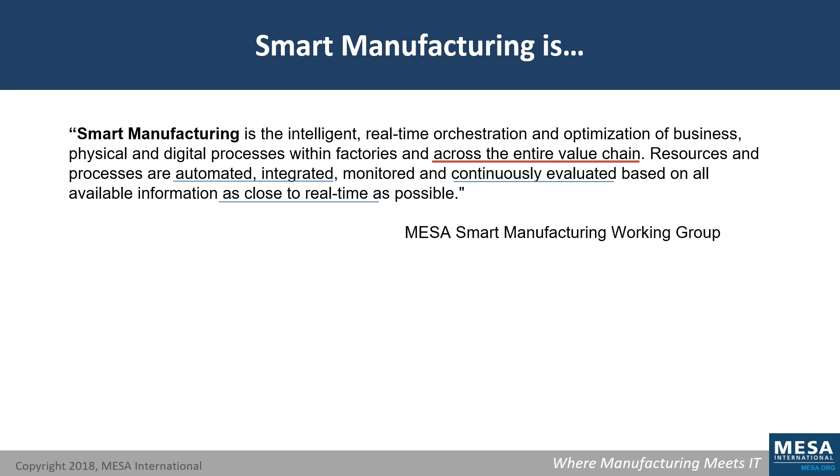But what is different about smart manufacturing compared to the last few decades of automation? Because after all, automation, integration, real-time sounds like things we've been doing for a while. What is different is that we're talking about a much, much higher level of connectivity. And we're talking about doing that across the entire value chain. We're going beyond the old hierarchical models, like the ISA-95 model.

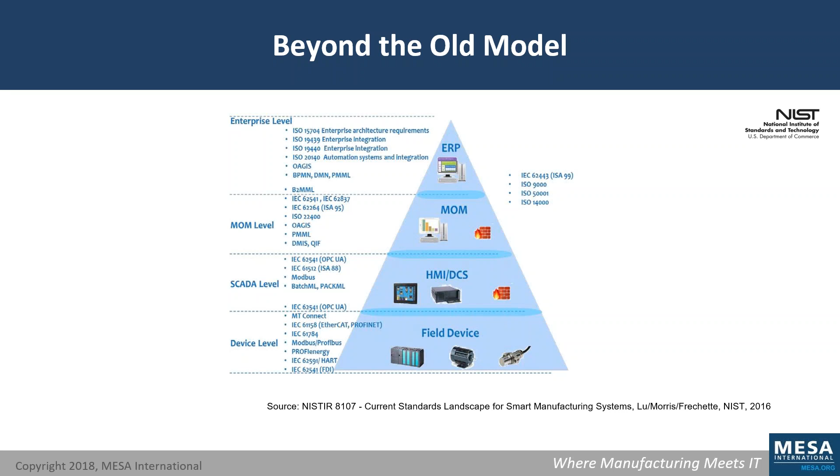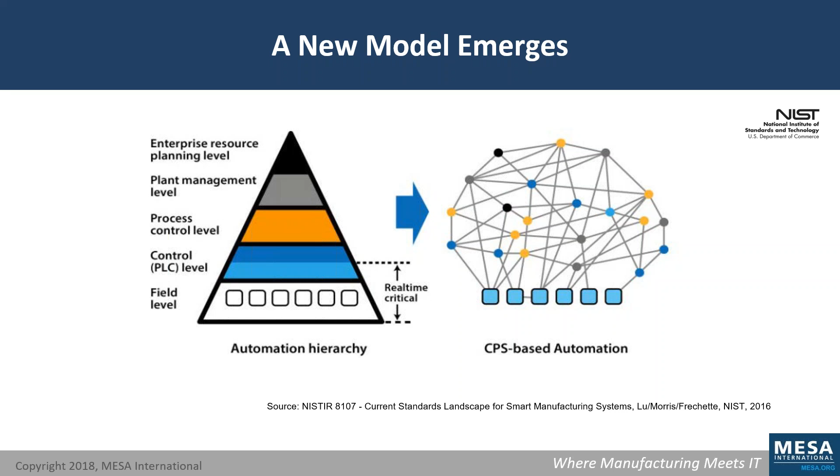We're leveraging technologies like wireless, mobile, artificial intelligence, cloud, and edge computing to achieve much higher levels of automation and connectivity. For example, NIST did a study of data movement in smart manufacturing and concluded that the old model was too constraining for this new, highly connected world. NIST believes that we're moving to a network of intense digital communication in all types of directions in the future of manufacturing, forming a complex digital tapestry. And believe me, that's a good thing, not a bad thing. It seems like a difficult thing, but we're going to make it easier.

By organizing this network of communications into three dimensions: digital thread, smart factory, and value chain. Dimensions that help us organize, explore, and explain these initiatives and understand the pull from each of these stakeholders' perspective on the transformation. We will discuss each of these dimensions right after we do a quick poll.

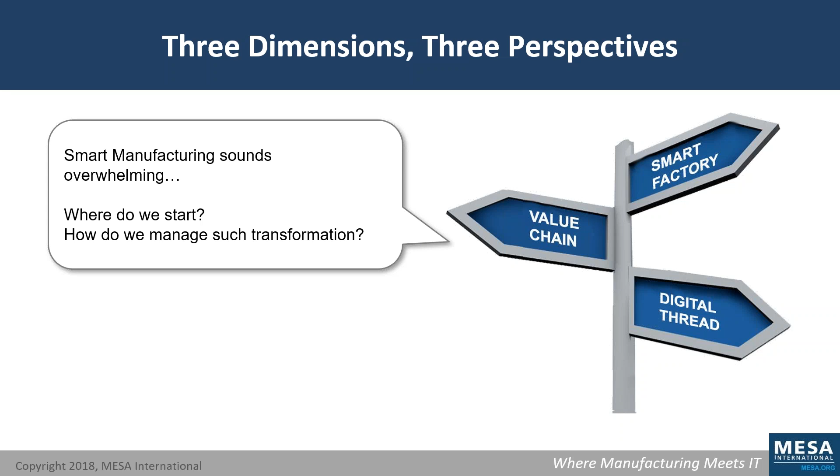And this is going to be a multiple choice poll, and your first time to participate. So please let us know which type of initiatives are part of your smart manufacturing journey in your company. What are the kinds of things you are working on today? Okay, I will give you a minute to do that.

And while you're doing that, I'll let you know a little tidbit here. I recently read an article that Accenture surveyed manufacturers and showed that 68% of executives believed that they had to work on digital transformation, but only 16% had a roadmap, a definite plan, and only 2% were executing to their plans. So at MESA, we're developing tools like these to help you develop those plans, to create your roadmap, to move forward. So let me see, I'm going to close the poll.

Thanks for sharing, and let's see what we have. So what we have is that IoT, smart factory, is really the dimension that is getting most work done, but we still have a considerable amount of people working on digital thread and on the supply chain dimension. You know, it's very often, like Gartner's reported, that the supply chain is being worked independently of these dimensions in the factory. But at some point, the manufacturers that really get these dimensions together are going to be the leaders of the future ecosystems.

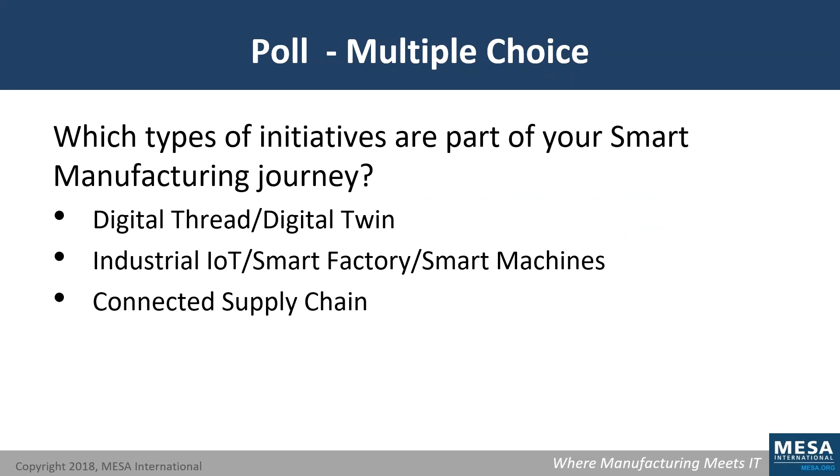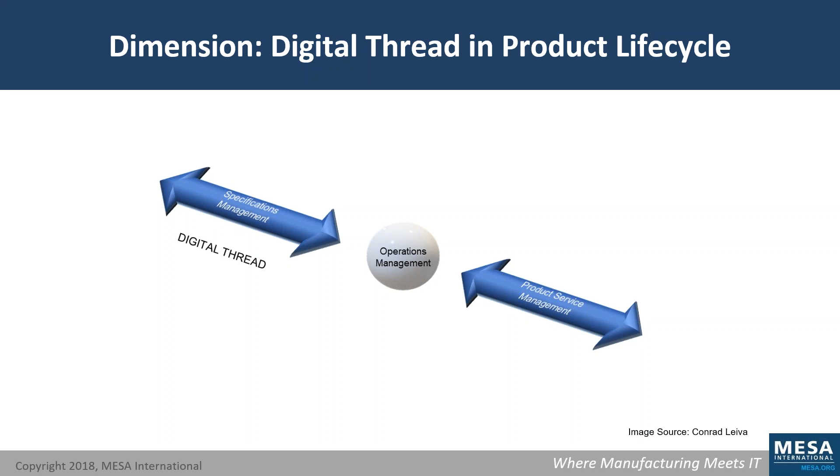So let me move on. Thanks for participating in that poll. We're moving together here. So now it's time to start drilling into each of these dimensions, and we'll start with Stu talking about the digital thread dimension. Go ahead, Stu, please.

Thanks, Conrad. You know, having started my career in product development companies, both large and small, I think the digital thread is enabling so many more opportunities to streamline processes and eliminate all the repetitive, manual, paper-based processes. It's just time-consuming, error-prone, and frankly, just not value-add.

Now, I like this graphic, although it's kind of rudimentary, but it effectively represents the process to define and produce a product. But you can imagine the other half of the equation, or a diagram much like this, that happens when you sell products, especially those that have to be supported through maintenance or warranty.

But I think one of the most important elements of digital thread is that concept of the repeatability, right? Digital transformation, especially with the addition of IoT, enables all our smart products to report back on their usage, giving product makers a lot more feedback on how to improve their products.

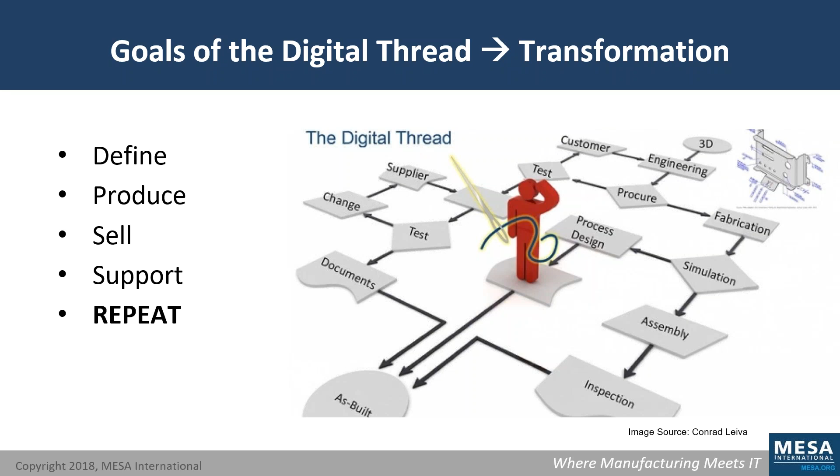Next slide. Now, I think it's important to set the scope of my remarks today on how the digital thread enables smart manufacturing. We can do a whole session just on digital thread. But the point I want to make today is that we're on a journey, right? A transformation between the old way and the new ways that all these digital technologies are providing us. And as quickly as we streamline and automate, products and processes are getting even more complex.

So at a minimum, the front end of the process is about populating that digital thread with voice of the customer requirements, what the product's supposed to do, that are then translated into design specifications, cascaded into functional requirements. And of course, in order to produce a product that's fit for purpose, we need to translate those specs into quality requirements, checks to validate that we're producing against the spec. And of course, we always have the ever-present compliance requirements from industry, government, customers.

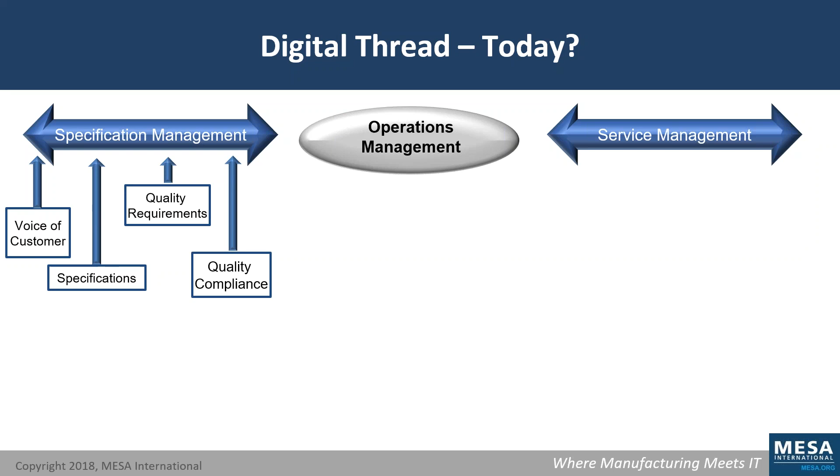But this job has become much easier to digitize with modern CAD and PDM, the model-based design. That's what MBD stands for in that acronym. That allows us to capture and document the requirements as data entities in the model, and then manage how the design satisfies those requirements. In fact, CAD and CAM systems have become very robust in terms of defining that overall product and digitizing the processes to produce them.

But we still see every day manufacturers who are still translating all their digital definition files, like CAD models, into paper documents like drawings and work instructions for execution. And I think there's a lot of opportunity for improvement in extending the digital thread through production operations. And Conrad will talk about that in the Smart Factory bit. But when we translate into a digitized operational system like MES, we tend to lose associativity between the model and all the subsequent operations against that model.

For example, I think we're getting much better at managing and documenting production quality. And we've had digital test systems and libraries for decades. But there's still a lot of translation and duplication of data as it goes from CAD to CAM to MES and into QMS. And I submit that might explain this continuous increase in product recalls, even though we still have quality compliance, kind of always just right along as a check in the box. But the after-sales service component, I think, has a lot of opportunity for enhancement as well. Next slide.

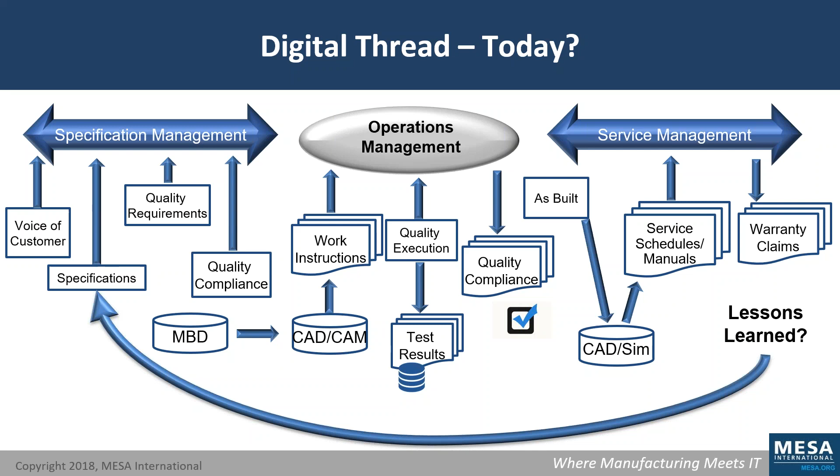Because what happens in this diagram if a change occurs, right? All of these handoffs, all of the processes need to be repeated, and somehow documentation needs to keep up to date. So one of the things that's missing, in my opinion, is a common platform upon which to store, communicate, and archive all the data to facilitate all these necessary processes for both product development and manufacturing, for the complete life cycle of the product.

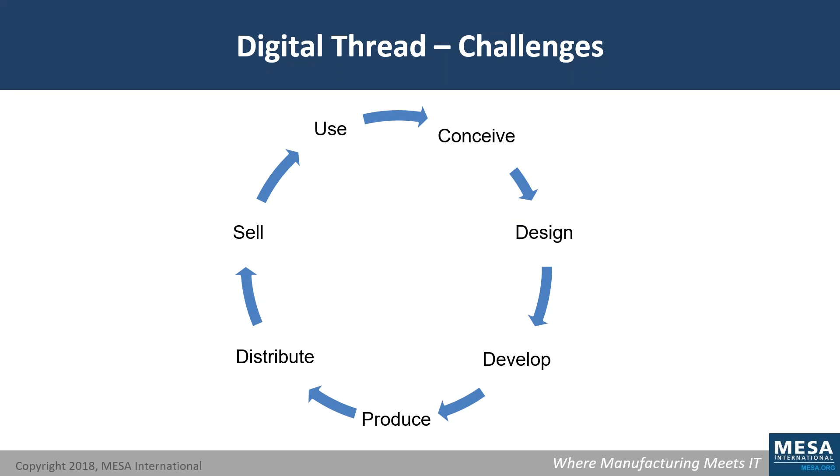Although I spent most of my career in PLM, I don't think we're there yet. Because between PLM, which is fundamentally an iterative platform that acts as a system of record up to release to manufacturing, and ERP, which is a transactional-based system of record from then on, it's challenging to keep all these data streams moving. And then within and frankly crossing over both these two is manufacturing execution, or MES.

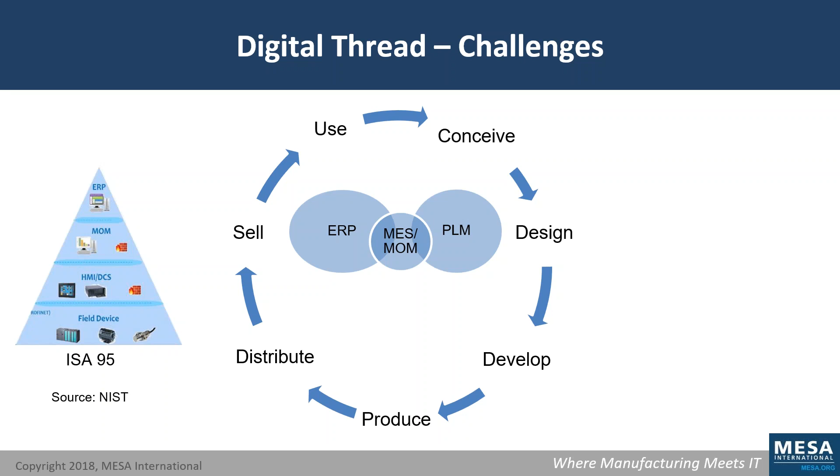Now, as Conrad mentioned, ISA 95 tried to reconcile all the data communication requirements, at least between the floor, MES, and ERP, but I agree with NIST that it's an old model and it's just not robust enough for today. And now we have new CRM systems like Salesforce.com getting into the fray, positioning as the repository for all the Internet of Things data, the smart products data. So now you've got new crossovers between IoT and CRM.

And again, all this is fine because each domain has different needs. But the point is the data I described in that previous slide has to somehow find its way from start to finish and hopefully repeat. And it's not like these silos can't be connected, because they can be, and they are being every day. I think many companies will call themselves model-based enterprises when they've effectively done this.

But the integrations are far from simple, and there are just too many different formats to convert from one domain to the next. And this was the point of an earlier white paper from MESA regarding smart manufacturing, the landscape explained. Because I think what's missing is that common schema for cradle to grave. And although the Venn diagram doesn't really capture the complexity of the challenge, this connected enterprise system with operational execution at the center is, I think, what we're really looking for and what the paper describes.

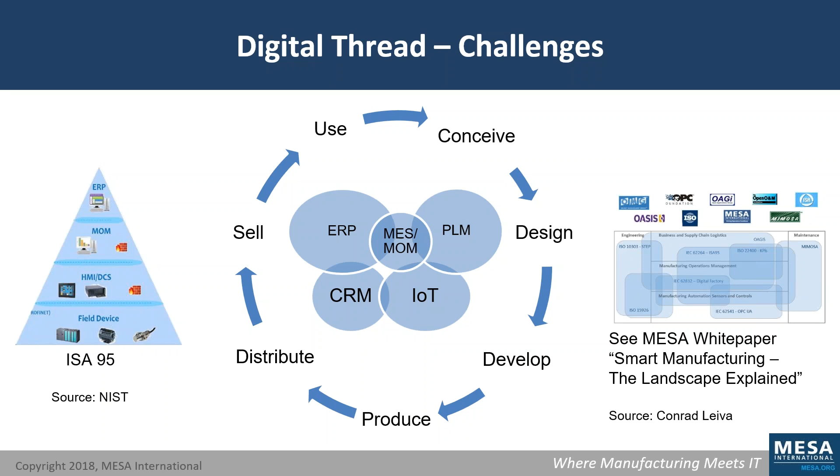So again, I think NIST is probably closer to reality than anyone else, but I always envisioned the digital thread as this flow from left to right, where the business has its need to sell a product to make revenue. R&D puts forth definition of the product to satisfy market requirements. Supply chain consumes those characteristics and often is contributing back as engineering partners.

Production execution has to extract functional requirements and then add back the actual performance against those requirements. Service is leveraging manufacturing and maintenance requirements and understanding the mechanical functionality so they can hopefully sort through why a solution failed. And again, adding on the new IoT to give us this closed loop of performance information that can help go back into the process and wash, rinse, repeat, right?

Because I think the biggest value of repeatability and having this data model is to eliminate manual paper-based movement of data with networked data, so that when a change occurs, it's easy enough for the database to adapt. So I think the future will be a network of data points connecting to and referencing each other as appropriate to the task at hand. It'll need to be in a common database or at least a network of interconnected databases. I think that's more realistic.

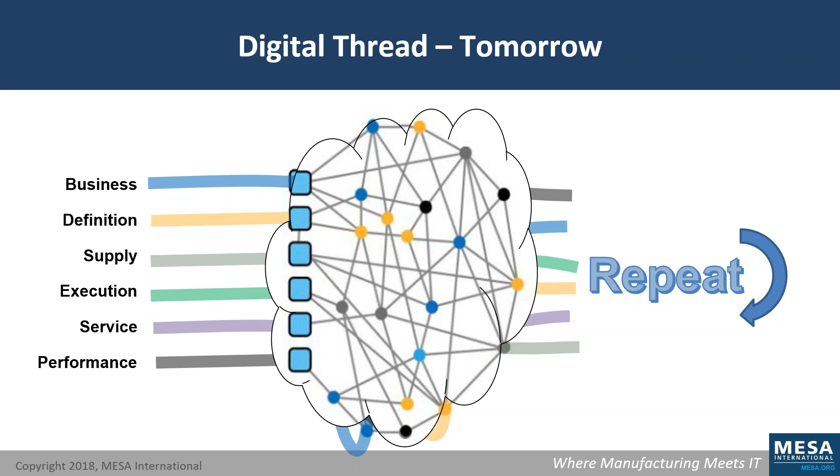But I want to close with an example from one of my customers, GenZe Scooters, a truly connected product, a smart scooter. They've got sensors and telematics designed in throughout them that constantly communicate with their data center. They send signals on the health of the vehicle, usage patterns, fault situations, and at any time GenZe knows where these scooters are, since they often sell to fleets, how much charge is left on them, and the speed they're traveling.

And all of these signals for each consumer are combined and stored with the VIN number in their Plex manufacturing cloud, along with all the service history and all the after-sales service management. It's a beautiful example of the Internet of Things going beyond the four walls and bringing data back in. But GenZe uses the learning from these signals to impact future designs.

In fact, they're considering scooter as a service to price by the miles rather than upfront. And then they can plan their lucrative service and maintenance business around that new revenue model. And of course, they've created their own closed loop digital thread by integrating their design systems with their execution systems

and the business systems. And one of their biggest challenges is they source materials and components from suppliers and partners all over the world, which sets up a pretty challenging value chain problem, which I think is the perfect segue to hand over to Jimmy to talk about the value chain management dimension of smart manufacturing. All right, so Jimmy, can you tell us more about the value chain dimension?

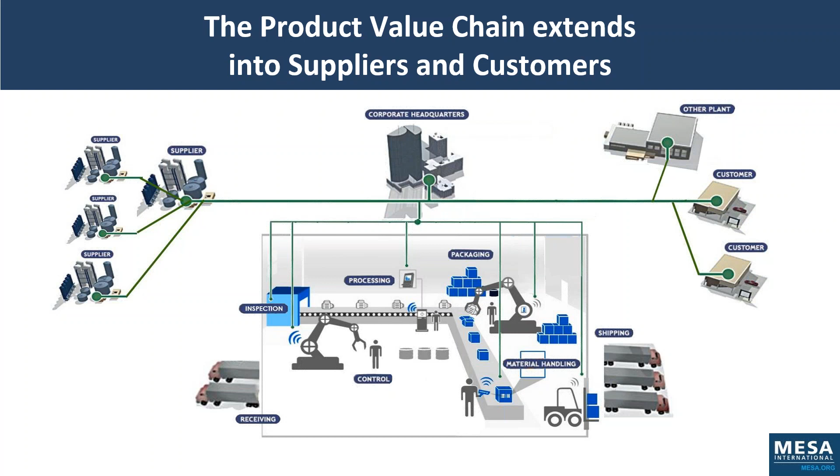transparency. This means that each node is exchanging data with the other. We must greatly improve these lines of digital communication, moving from emails and phone calls to a truly set of digital threaded workflows with our value chain partners. One example that I like to share is in the food industry. When you think about it, food is a product of chemistry, yet its makeup is completely dynamic and changing. The ingredients themselves are changing.

Their breed, age, environment, and diet can alter the milk itself. While we might think of some elements like taste, the fat and protein content vary as well. These are the elemental makeups of cookies and yogurt. Now, in the case of our yogurt manufacturer, how do they account for this? They need a consistent level of fat and protein to get a consistent product.

Oftentimes, blending is used to ensure that you have a baseline consistency, mixing different milk sources together, either through the co-op or at the factory itself. But sometimes that might not yield optimal results. In the case of the manufacturer, we'll use condensed milk to boost levels, requiring a surge in the supply chain or an alteration of the manufacturing process itself.

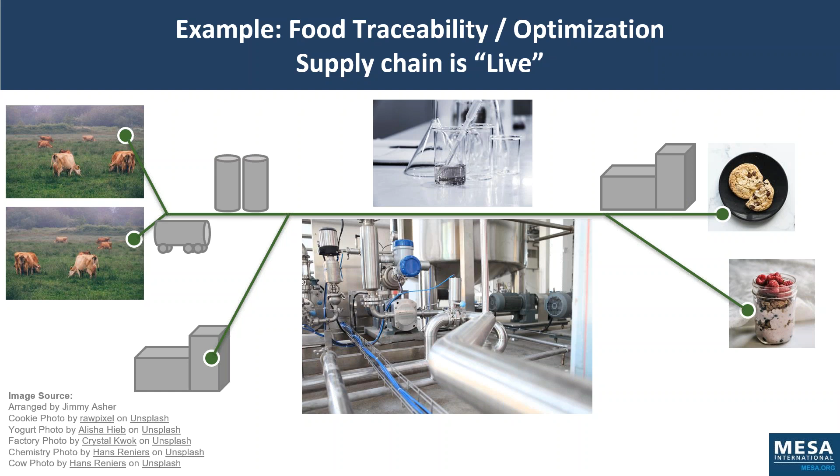Okay, thank you, Jimmy. As you mentioned, each plant, each factory is a node in a multi-level value chain. That means that each factory node needs to be ready to participate in this new era of real-time digital data exchange in that value chain. The smart factory dimension is therefore very important because data is only going to move across the value chain as fast as the slowest link in the chain.

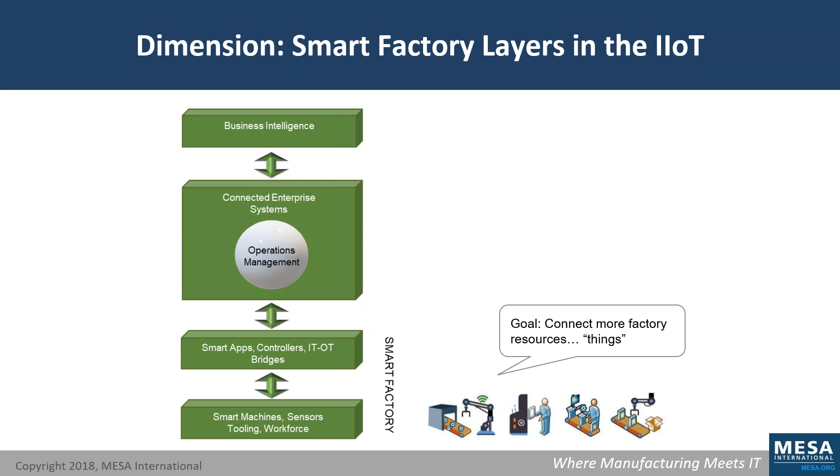This dimension can also be referred to as the industrial IoT dimension, with the goal to connect factory resources to gather data directly from equipment as close to real time as possible. Data that needs to get contextualized and analyzed at different aggregation levels. Data that triggers immediate response to situations requiring attention, from adjusting machine settings to modifying the normal routings to accommodate a machine downtime. Data is passed to each level for different types of analysis, not necessarily serially. Actually, it should probably be in parallel so we can achieve processing as close to real time as possible.

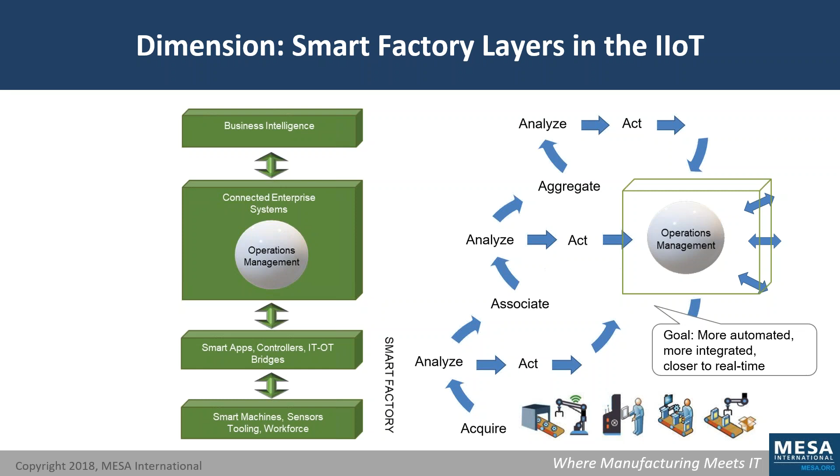Data passed to all applicable enterprise systems, including ERP, MES, PLM, and supply chain. And data needs to flow up to business intelligence, where we calculate actionable metrics tied to our corporate goals and KPIs. Acquire, associate, aggregate, analyze, and act. All very important parts of this dimension. Each layer has different types of technology, tools, and different types of analysis and visualization. They're all important to the overall system.

For example, we might be measuring temperature or pressure of an oven at the lowest data level. At the next level up, we're tracking events like job starts and ends, issues holding up production. And at the highest level, we are tracking products completed per day and productivity levels for the entire week. Whenever possible, we want the triggered action to be an automatic response. And actually that's becoming more and more practical with the advances in artificial intelligence. But for some cases, we're still going to need to trigger manual actions at the operations management level.

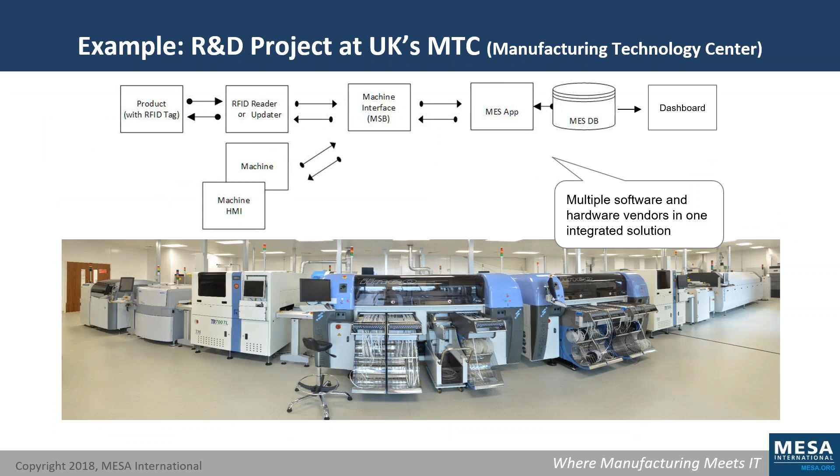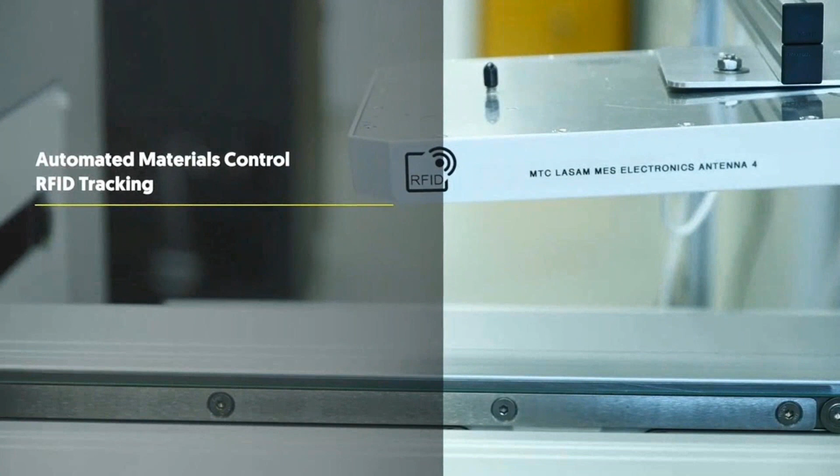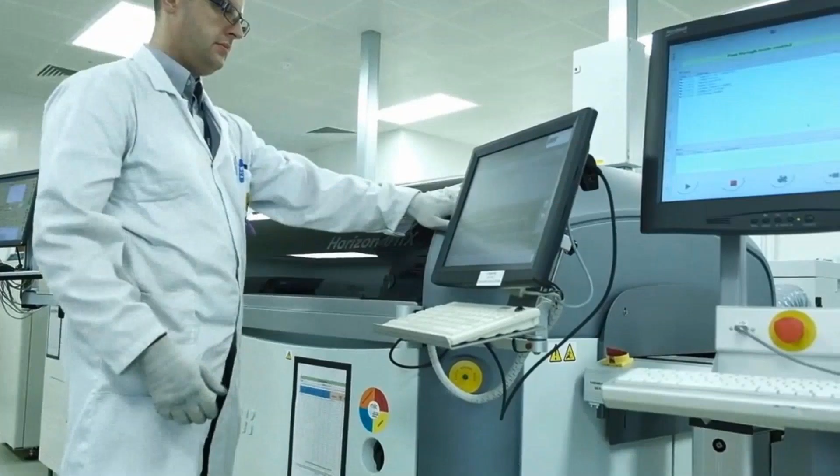So let's look at an example of how the smart factory can come together with an example here at the electronics lab at the UK's Manufacturing Technology Centre at Coventry. In this example, a flexible manufacturing cell was set up and configured each machine with the right program for each different board coming down the line. The boards are identified by RFID. We used to set up this line for long runs of the same board, but now we can run custom jobs for each different single board coming down the line. We can move to order quantity of 1 because of the efficiency provided by this level of integration and automation between hardware and software vendors, and actually among different vendors of hardware and software.

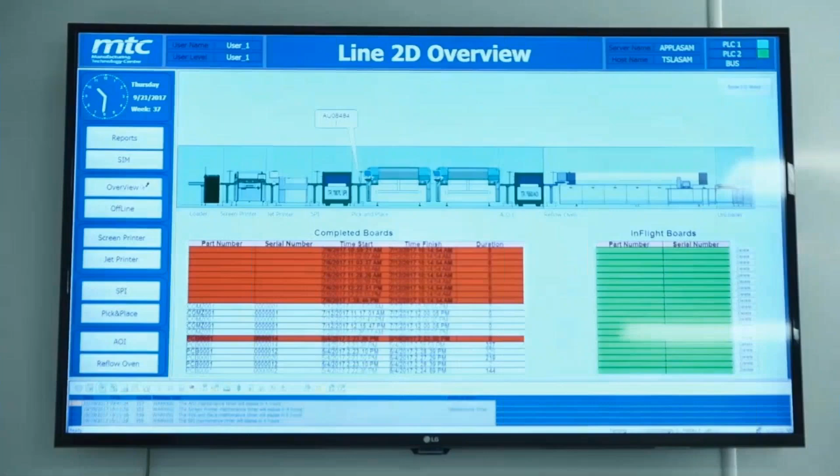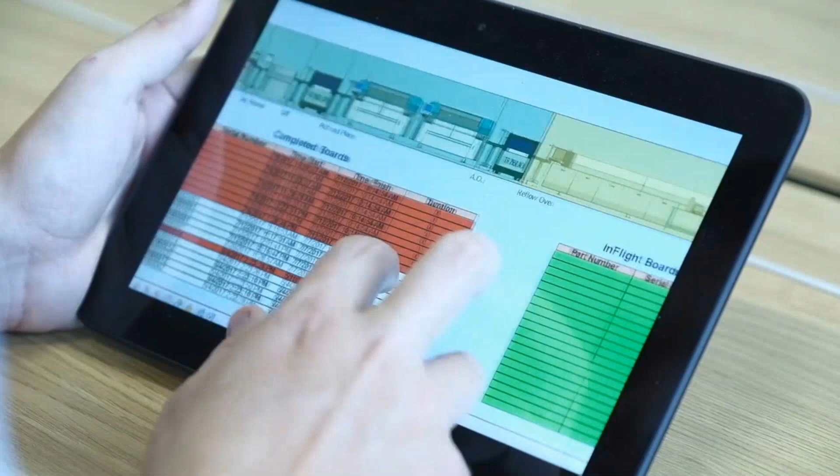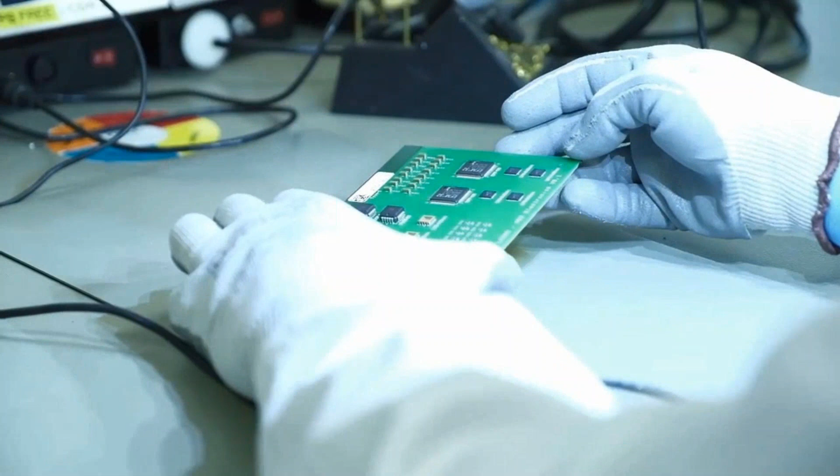Data is flowing from machines to a machine service bus to an MES, and also in parallel it is being aggregated to display at a graphical dashboard with the current status for each station. If the data collected shows a problem, the conveyor belt diverts the board to a rework station, where we use instructions in augmented reality to fix the board and return it back to the line. There's a lot more to this example, but you can see how data is flowing between machines, software, and business intelligence in the smart factory dimension, and among solutions from different vendors. Easy multi-vendor integration is a key goal for smart manufacturing.

The examples so far have been focused on different dimensions, but it is hard to keep examples to just one dimension. The value of this new level of connectivity in smart manufacturing is going to be much greater when we link all these dimensions together. Jimmy, can you talk to us about an example that crosses multiple dimensions? Sure, I'd be delighted to.

Perhaps one of the best examples that comes to mind is in the manufacturing of hard drives. As we all know, the computer market has seen explosive growth over the past couple of decades. Along with that growth, there's an evolution taking place. Demands for storage space are also increasing with an ever smaller footprint. The market has forced the elements that comprise a typical hard drive to grow increasingly smaller, now at the nanoscale. At this scale, physical shifts in temperature, vibration, and process layering require material to be deposited in several atoms thickness. It's common to process, measure, but that's very restrictive in throughput.

The only way for manufacturing to keep up with demand is for the equipment, or in semiconductor speak, the tools, to share the downstream information with other tools. This goes beyond traditional optimization and enters a place where both real-time and transactional summary data is used by machine learning algorithms to sweep over the data, to watch, alert, intervene as the processes are optimized and controlled. This requires the smart factory dimension that we just discussed.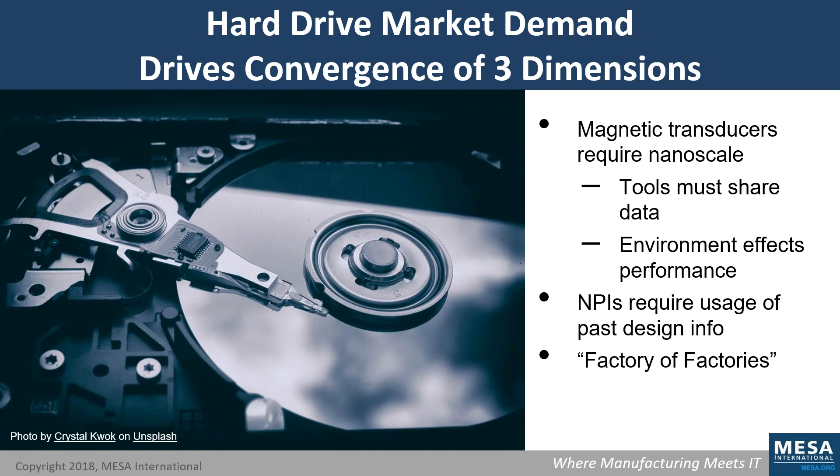Semiconductor tools are expensive. So the data we capture during the manufacturing needs to be fed back into the design process and ultimately govern the specification of key process steps, which was the first dimension that Stu spoke about, the digital thread. Now I can dive deeper into any one of these specific elements. The key takeaway is that all three dimensions are truly an interplay and drive competitiveness.

Conrad, back to you. All right, thanks for that example.

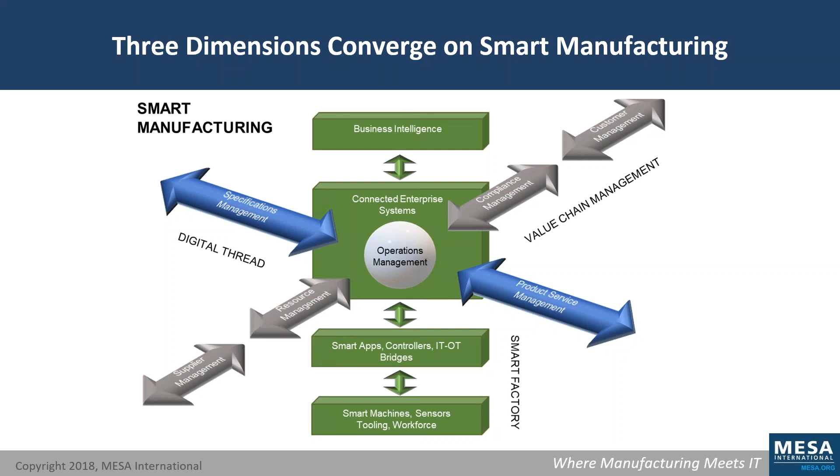And I think that ours is a little simpler, but the NIST paper does have a lot of good information on standards and demonstrates how there's a lot of dimensions to this problem. So no doubt about it, this is hard work. The model we discussed today can be a starting point for your organization. The important thing is that you pick a starting point and create the model for your company and the plan for your organization.

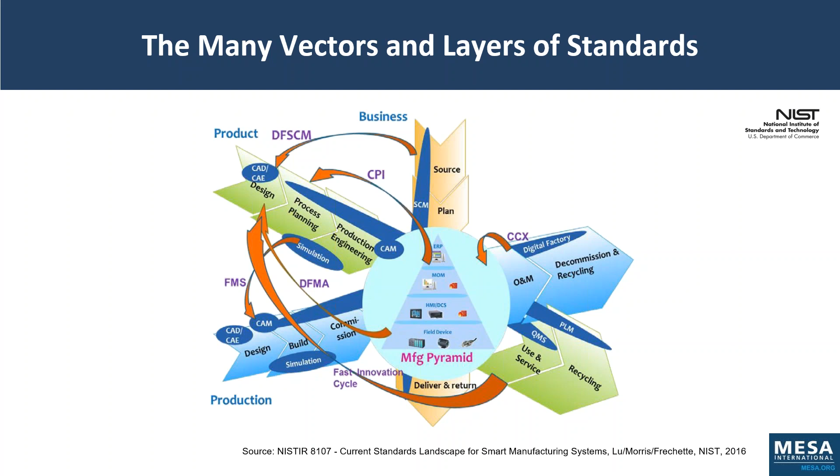Then we focus on boxing functions in the value chain and what integration is needed between those functions. So we're focusing on integration versus trying to create one giant system in one box, because we know that pieces of the box are going to have to be replaced, and we want to set up for flexibility in the future. By focusing on integration that is needed in the main functions, we will have a more robust and flexible system for the future.